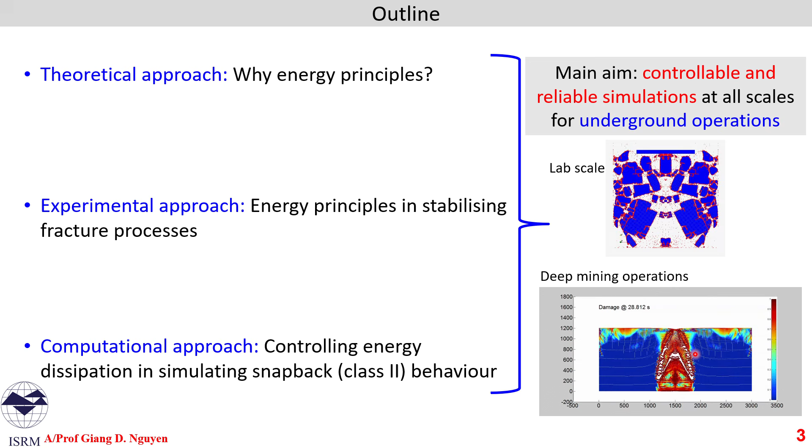So we start first with the theoretical approach, where I will explain the importance of energy principles and the use of energy principle to predict rock burst in mining operation.

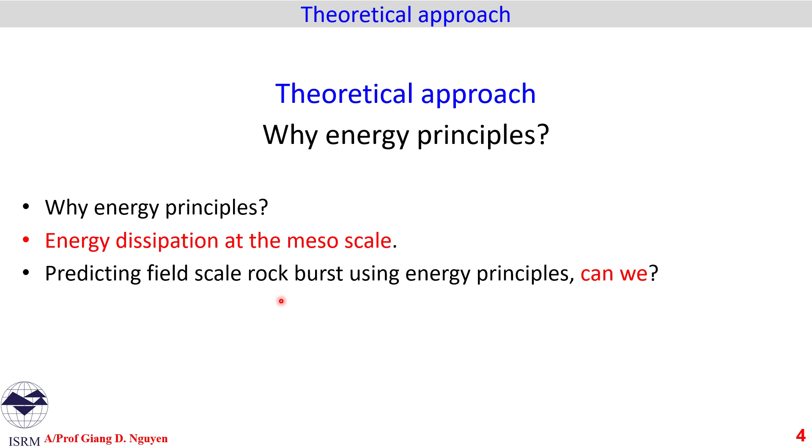So at first, this is the test to give us an idea about why we need such a thing, say energy principle, and how useful that is. This is the ISRM standard or recommended test using the chain extensometer on the uniaxial compression of a sandstone in this case. If we are able to successfully control the test, the result will be shown later.

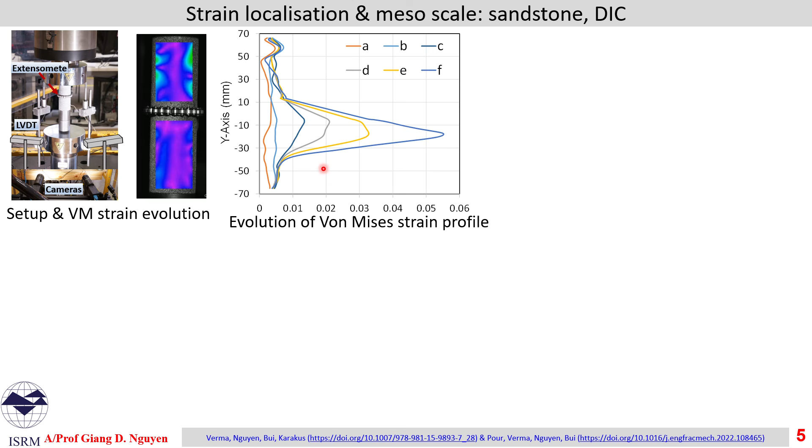We can see the strain evolution and in the end a shear band like this. If we plot the evolution of von Mises strain across the shear band at different stages, we can see such a kind of strong inhomogeneity well beyond the acceptable range for what is called homogeneous kind of material behavior. That happens mainly close to the peak, and beyond the peak, this strain localization intensifies, and in the end, clear shear bands occur, separating the specimen into two parts.

If we plot the evolution of strain, say axial stress and time, together with three different strains - the strain inside the shear band, the red zone here, the strain outside the shear band, and the macro average strain - we clearly see the bifurcation point, beyond which all these three strains follow different paths. Outside the shear band, unloading happens. As you can see, somehow the reduction of strain outside the shear band, while the von Mises strain inside the shear band keeps increasing. The macro one, the average one over the volume, is the volume average.

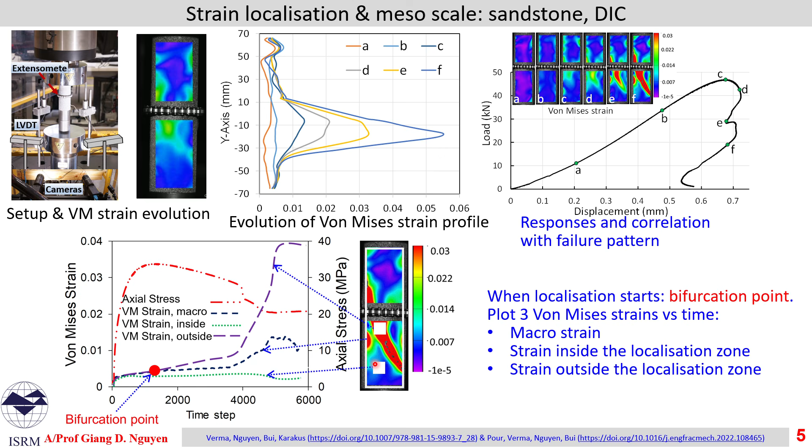And this is telling us something. This is bifurcation, beyond which we don't have a single stress-strain relationship anymore. Stress can be very similar, but strains, as you can see here, become very different. The macro strain, the volume average one, and the strains inside and outside the shear bands, they are very different.

Now, if we test three different aspect ratios, length by diameter of 1.5, 2.5, and 3.5, and plot the load displacement curve, we get three very distinct curves. The longer the specimen, the softer the behavior.

Softer means the initial elastic stiffness is lower, and the post peaks are also very different. But if we normalize everything to get stress-strain behavior, we see that the elastic stiffness is almost similar, with some small variation due to inhomogeneities of the material across the three specimens. The post peaks are very different, so stronger softening or snapback for the longer specimens, length to diameter of 2.5 and 3.5.

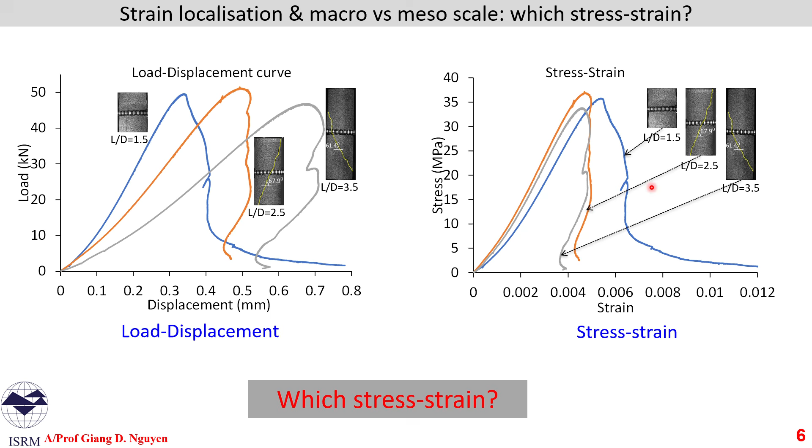So the question is: which stress-strain relationship will we use? We know the strain will be different, so we plot the average one here, and they will also be different across the three specimens.

If we use digital image correlation to work out the stress-strain relationship, stress is assumed roughly the same because they need to meet equilibrium condition across the shear band. Strain, as we know, is very different.

If we plot the macro stress against strain, inside the shear band in red, outside the shear band in blue, and the macro black one, we see three distinct behaviors: unloading outside the shear band, and strain intensifying inside the shear band.

The macro one is in fact the volume average one. In this case, we cannot use the macro, volume-averaged one to represent the behavior of the material.

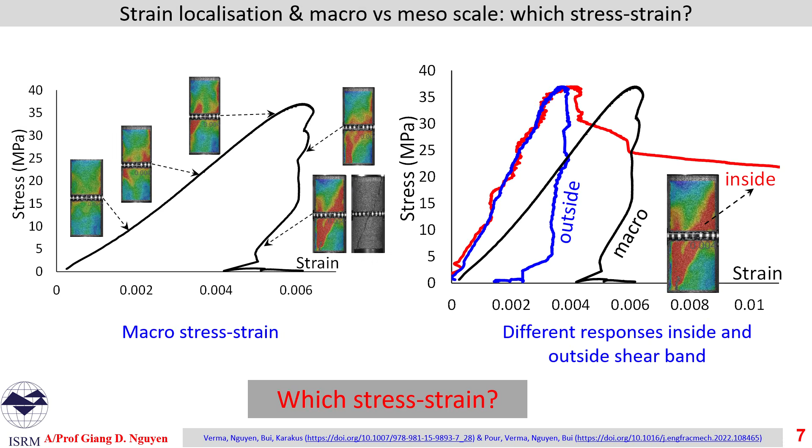We go one step further to look at energy dissipation. I represent here the load displacement curves of these three specimens. Under idealized conditions, the two specimens with length to diameter ratios of 2.5 and 3.5 roughly have almost the same shear band angle, and ideally under the same stress conditions and same material, this shear band angle should be the same, and it is the case when the length to diameter ratio is large enough.

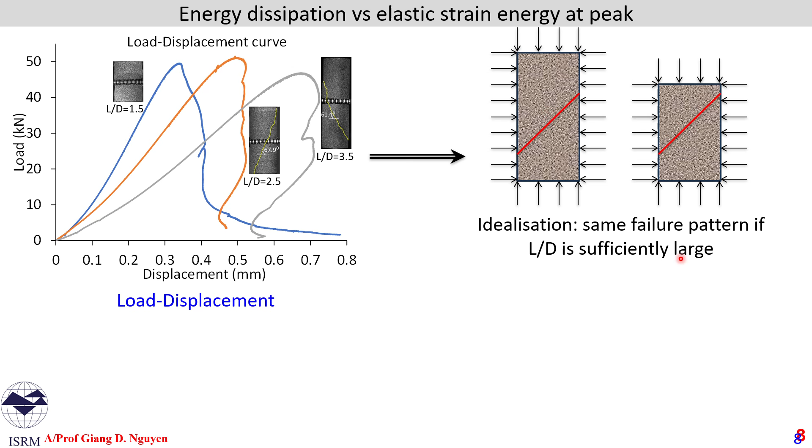So we consider these two cases as an example. The conclusion is that if they are under the same stress conditions, they should have the same shear band angle and the same dissipation, due to the creation and evolution of the shear band.

If the dissipation is due to fracture, it scales with the surface area due to the creation of new surface areas. But if we look at the whole specimen under the same stress condition, and look at the peak, they store different amounts of energy. The peak of all three specimens is roughly the same, and theoretically they should be, because they're the same material and failure happens at peak under the same stress threshold.

The area under this curve represents the energy stored in the specimen, and the stored energy scales with the volume. So the larger specimen has larger amounts of strain energy at peak stored in it.

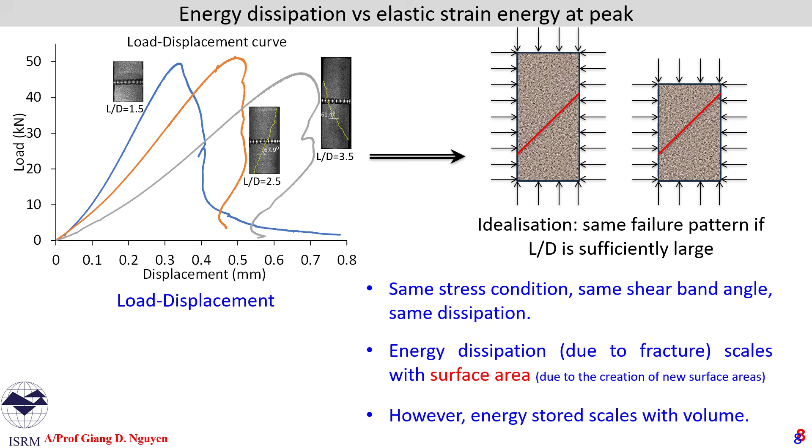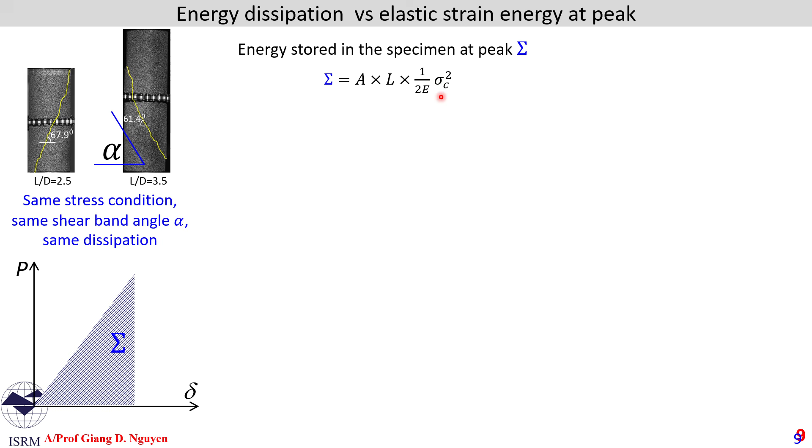If we look at these two cases and plot the load against displacement, we can see that at peak this specimen is storing some amount of energy, sigma, scaled with the volume of the element. A is the cross-section area times the length, and 1/2 sigma c squared over E, with sigma c being the compressive strength, is the strain energy per unit volume.

The dissipation in this case scales with the area. Given the shear band angle and the cross-section area, we can work out the area of the fracture or shear band. Assuming the dissipation per unit area is GF, we have the dissipation of the specimen at the end of the failure process.

Snapback, or class 2 behavior, happens if the storage is larger than the capacity of the specimen to consume energy. As you can see here, the red area, snapback happens if the red area is smaller than the hatched blue area.

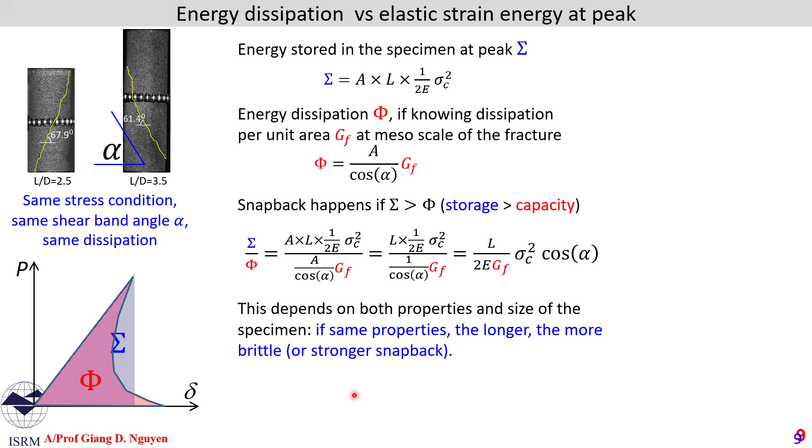That means for the same materials and properties, the longer the specimen, assuming the same cross-section area, the more brittle the load-displacement behavior is, and hence the stronger snapback observed. This is what we saw earlier in the previous slides.

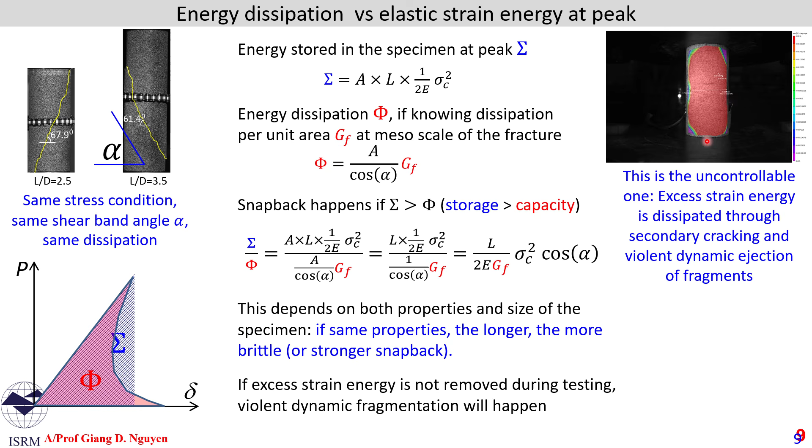To control it, we need to remove the excess strain energy in the specimen so the test machine can successfully capture this kind of snapback. If not, very brittle or violent dynamic behavior will happen, as seen here from our test under direct, vertical displacement control.

So what can we do here? If we know this energy principle, we can proceed further in using it to predict rock bursts. As you can see here, a video of rock bursts in underground operation, we consider the stress condition and a certain type of specimen with this prismatic shape.

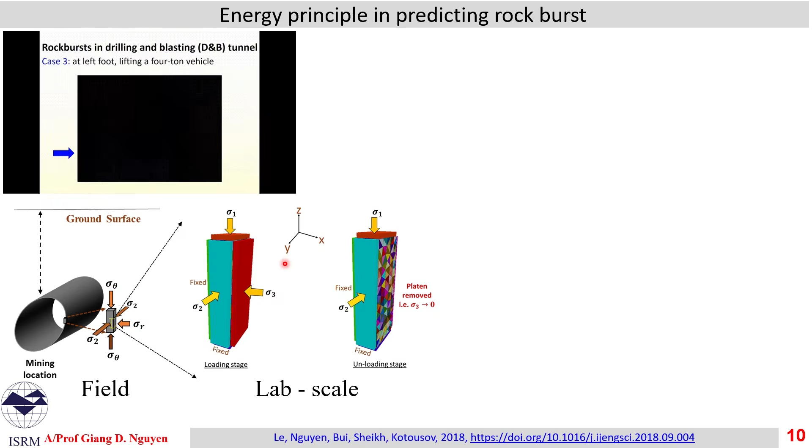We know from our theoretical work that failure happens depending on the stress state, and the shear band or localization orientation depends on the stress states, as you can see here. This is the illustrative result from our papers, validated with experimental data.

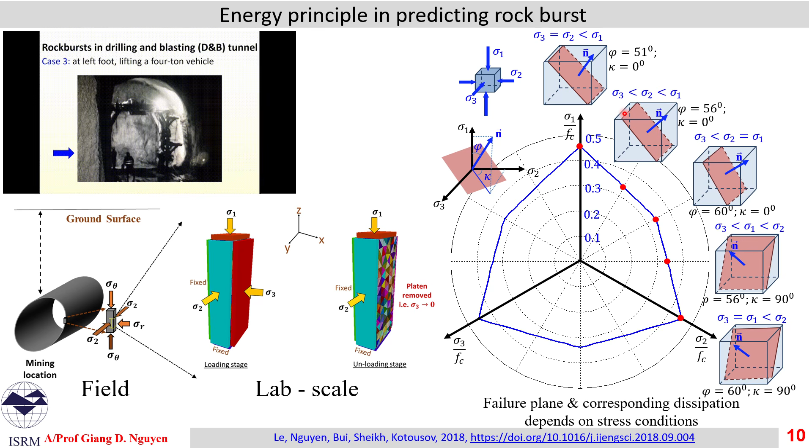We use this kind of failure pattern and corresponding dissipation, because dissipation mainly happens on the shear band or on the fracture surface. So we use that to bring it to mining operation to predict rock burst.

So if we consider this kind of prismatic volume element with width W and depth B, length L, H given under three principal stresses sigma 1, sigma 2, sigma 3, we can work out the elastic strain energy stored in this volume element before the release of stress in one direction. As you can see, it scales with the volume of the element, and is given by one half C ij KL, sigma ij, sigma KL.

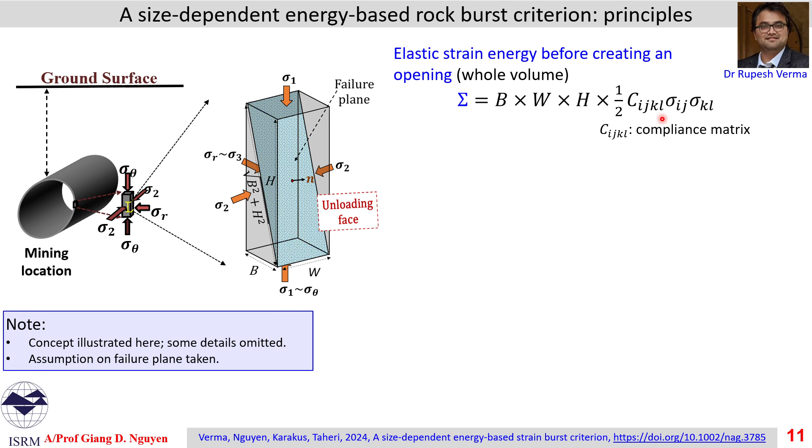It is the elastic strain energy stored in the volume, per unit element, per unit volume, before the failure.

So if one principal stress is released, failure is assumed to happen on that plane, and the dissipation capacity of the specimen scales with the surface area of that plane, and we can work out the dissipation capacity in this form.

Rock burst in this case happens if the specimen stores energy more than the capacity to consume it. That's the ratio, and that allows us to give an indication, or even magnitudes, of rock burst. So if storage is greater than capacity, rock burst can happen, but this is not always the case, because it still depends on another sufficient condition, which is the failure criteria.

This is a simplified presentation of a more technically complex one. Some details are neglected here just to make the presentation easier to follow. You can have a look at our paper, published a few years back.

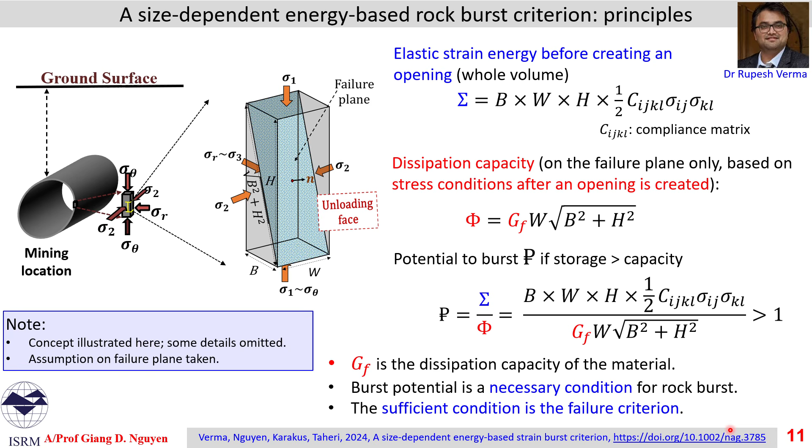So now this is the illustration of how things work, how we use the concept of burst envelope here to help predict rock burst.

We have the first stress path, the stress path going out of the burst envelope. That means the energy stored in the specimen under this stress condition is potentially leading to bursting, because the storage capacity is greater than the dissipation capacity of a single shear band in this case.

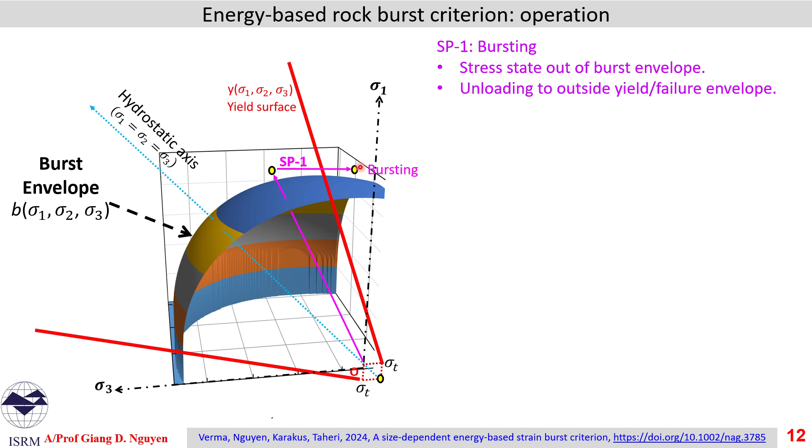And if we unload it, meaning we release one principal stress, it is shooting outside the yield surface or failure surface, the red curve here. Then it will indicate bursting, because in this case two conditions are met: the initial stress point is outside the burst surface, and the one after stress release is also outside the failure surface, so bursting will happen in this case.

But the second stress path gives us an indication of burst potential, but when one principal stress is released, the stress path is pointing back to inside the yield surface or failure surface. So in this case these two conditions are not met, so no failure or bursting.

The third case: both points, beginning and after the release of stress, are inside both the burst envelope and the failure envelope, so no failure happens.

The other scenario is the case of the stress point at the beginning, with the three principal stresses inside the burst envelope, but when one principal stress is released, it moves outside the failure surface. In this case, no bursting happens.

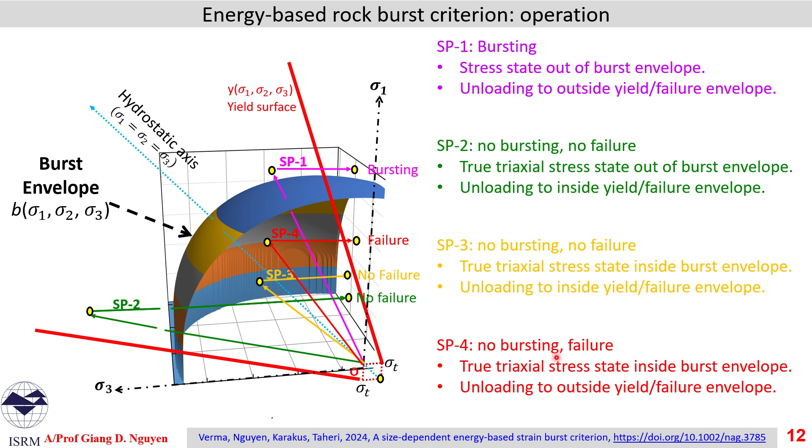So we have this theoretical illustration and also the validation here. Only one case, with this stress path 1 which leads to bursting, is used here.

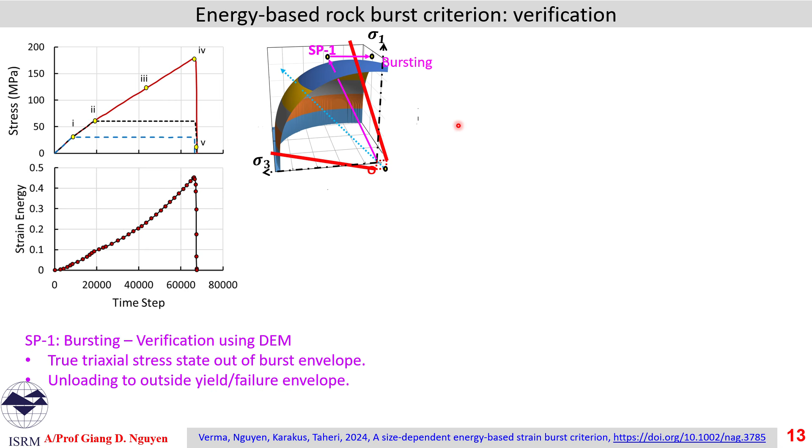So if we load the prismatic volume element to a certain stress level, sigma 1, 2, 3, following this kind of stress path, and release one principal stress, in this case the final stress point is outside the failure envelope, and bursting theoretically can happen. Our discrete element simulation, following the same kind of stress condition, and the release of one principal stress in this case leads to violent dynamic behavior.

Which is an indication of bursting. So this is the case of bursting, theoretically predicted and verified using numerical simulation.

Of course this is a simple enough illustration of the concept followed by verification. It will take a lot of work and time to bring this to practice, how to apply this in deep mining situations. So we are still working on that.

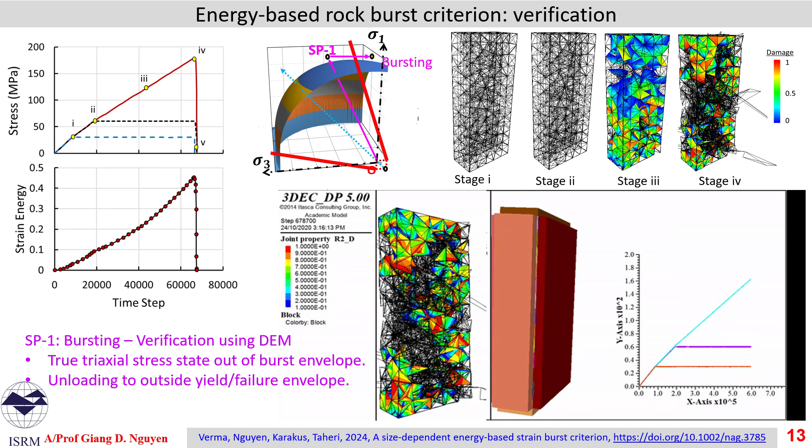So I have shown the theoretical approach on why energy principle. We will apply some of the things presented in the previous part on stabilizing fracture processes in rock testing. The main aim is to get more intrinsic properties.

An example here is the fracture energy in a loose sense at the mesoscale of the fracture. Mesoscale here refers to the scale of the shear band or fracture surface. We'll show some test results and implications as well.

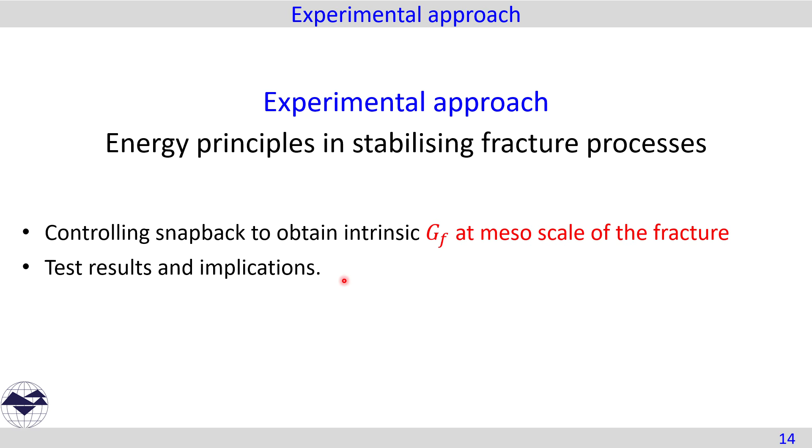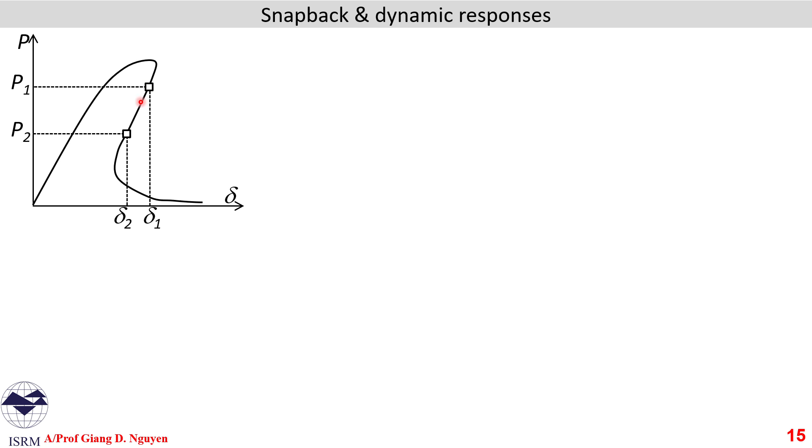So at first, it's about snapback or class 2 behavior. We use a 1D example here because it's always easier and more straightforward. We indicate 2 points, P1 and P2, along this stress path, and correspondingly we have 2 displacements, delta 1 and delta 2, on the snapback curve.

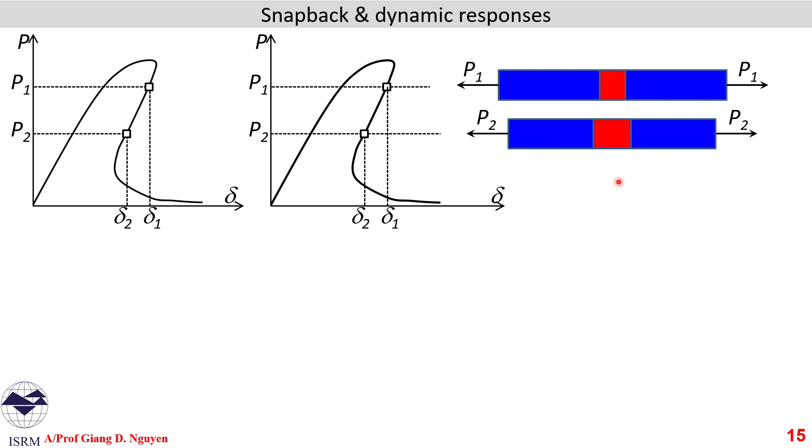So if this is the macro load displacement behavior, it's a combination of two behaviors inside and outside the fracture process zone. The red zone here is expanding while the blue zone is shrinking, indicated by the two different parts. They are under the same stress condition or load, if the cross-section area in the red and blue zones are the same, which is the case assumed here.

So the macro curve is the volume average of the red and blue ones. Snapback happens when the blue one is shrinking more than the expansion of the red one.

And this is what we may have in experiments. Say if we have a longer specimen, the blue zone gets bigger while the red zone stays almost the same, because if they're the same material under the same stress condition, the fracture process zone is the same in both the longer and shorter specimens.

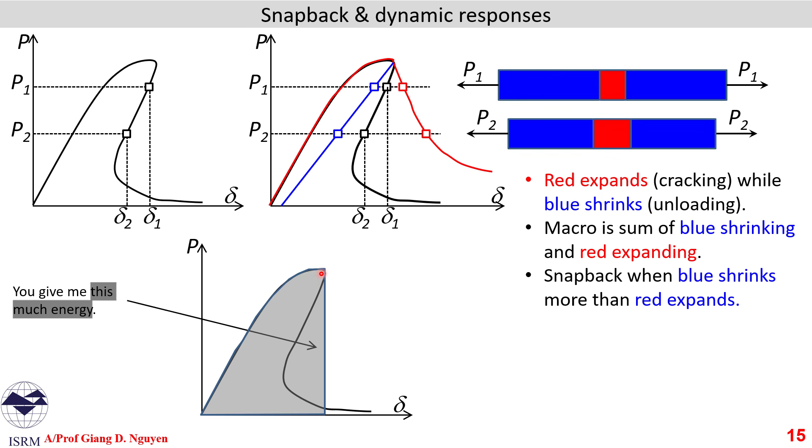So in terms of energy, this is the case: the gray area here is the energy stored in the specimen at peak, but the snapback here, the red area, is the energy the specimen can consume. If we give the specimen more energy than its capacity to consume...

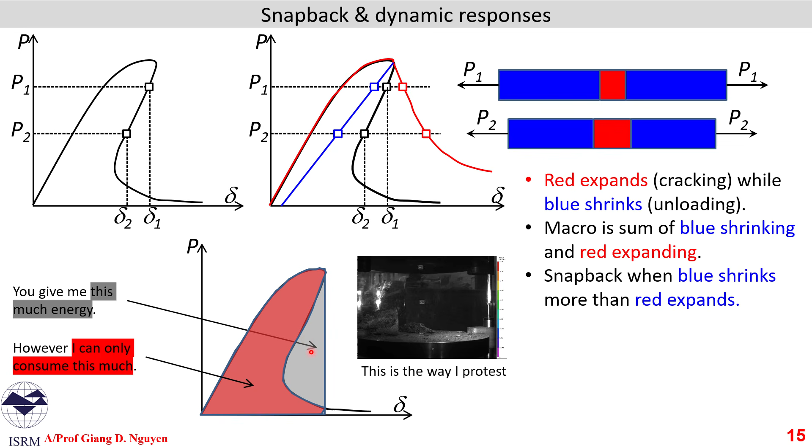...through a single fracture process zone or shear band, then more shear bands or even very violent behavior must happen to consume the excess strain energy, the difference between the red and gray areas. So we use this principle in testing to control the fracture process, based on PID, which stands for proportional, integral, and derivative.

So say if we have these two things and we are using the expansion of the red zone to control the process, it means the crack opening, or the rate of crack opening, should follow the specified value that is used to control the fracture process.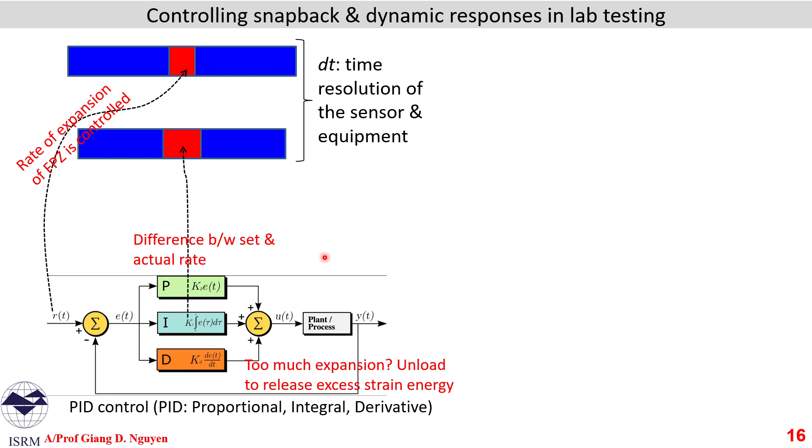And if this is expanding more than the specified value, slight unloading will happen. So this loading-unloading process using PID control will gradually remove the excess strain energy and allow us to capture the whole fracture process in a very stable way.

We use this in a few different kinds of tests, and one of the more challenging ones is the Brazilian disc. In this case we use lateral expansion from an LVDT as feedback to the control, so that the loading process, the vertical velocity, can be adjusted gradually to remove the excess strain energy.

Of course, this is just one example. Another example includes the use of acoustic energy release or dissipation, if we have a way to measure it, as the control.

The dissipation or energy release happens mainly inside the fracture process zone at the mesoscale. The quantity related to the mesoscale can be a good one for control. It could be acoustic energy release, dissipation, or expansion of the fracture process zone.

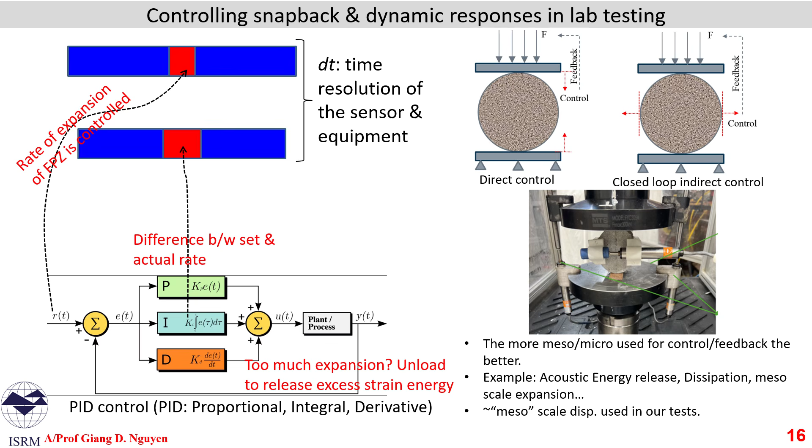The same principle applies to triaxial tests. In this case, we use lateral strain attached to membranes for testing hard rock, and we can manage to capture snapback even under sufficiently high confining pressure, say 60 MPa, for a hard rock.

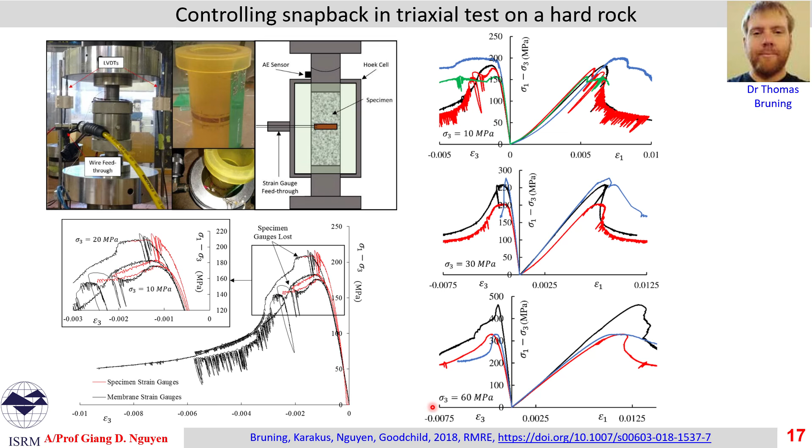This kind of control we call AUSBIT, Adelaide University Snapback Indirect Tensile Test, has been applied to a range of materials from soft rock like sandstone, to hard rock like granite, bluestone, and even concrete. Concrete in this case exhibits class 1, or normal softening behavior. The technique was able to capture both class 1 and class 2 behavior for a range of materials, as you can see.

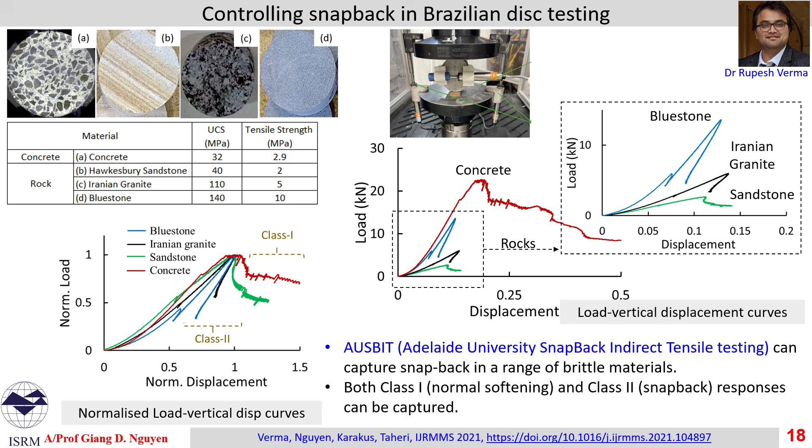So what happens here at small time scale? We already mentioned the release of strain energy to stabilize the fracture process. We use this example of a successful Brazilian test using AUSBIT, our control method, to show the principle and how it works.

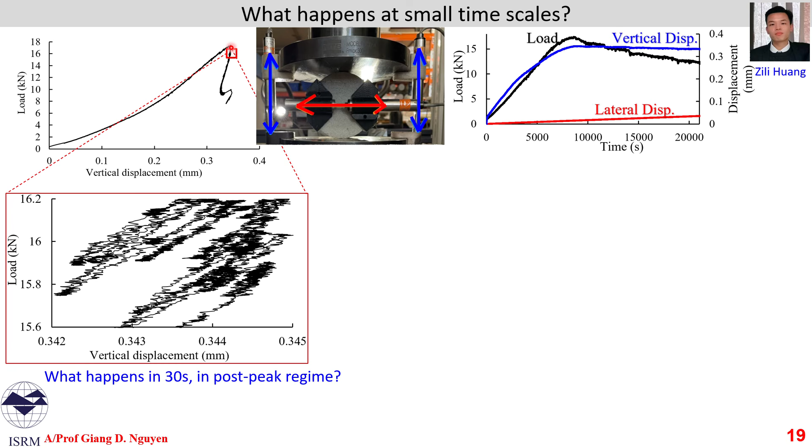If we look at a short time window, 30 seconds in the post-peak regime, we can see the effects of loading and unloading when we plot the load and vertical displacement together. The curve that looks smooth at a glance, when we zoom in, has this kind of behavior. And this is the consequence.

If we plot the load, vertical displacement (blue one), and lateral displacement against time, with a 30 second time window here, you can see the vertical displacement follows a downward trend, reducing, indicating snapback behavior or class 2 behavior. The lateral displacement, which is used to control the whole failure process, goes up and down, but the overall trend is always increasing, meaning fracture is gradually happening.

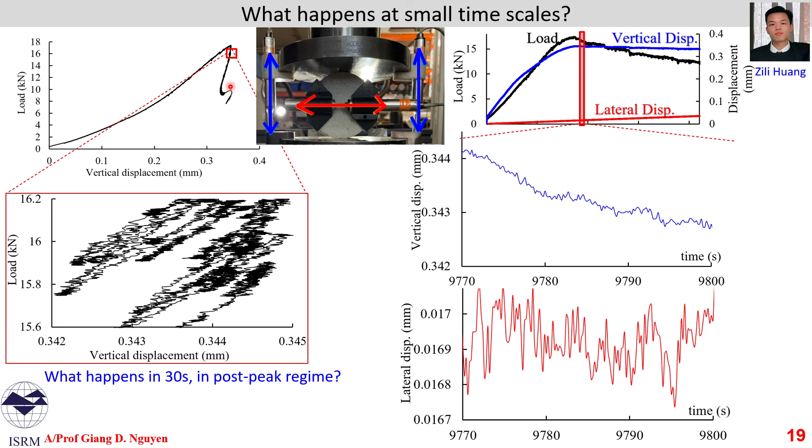The unloading and reloading process in a very small time scale, as you can see here, allows gradual release of excess strain energy, so that this kind of snapback can be successfully captured.

So we use this kind of test to work out two things reliably: the tensile strength. We know that Brazilian disc testing will give us indirect tensile strength close enough to the direct one, and we go a step further, inducing this successful snapback test using AUSBIT to obtain mode 1 fracture energy as well. So if this is successful from a single test, we can get two important properties: tensile strength and mode 1 fracture energy.

This is different from the standard test using 3-point bending configuration. The load in 3-point bending test drops to 0 at the end of the fracture process. For Brazilian disc test, if the specimen is fully split, the two halves can still hold a significant amount of load.

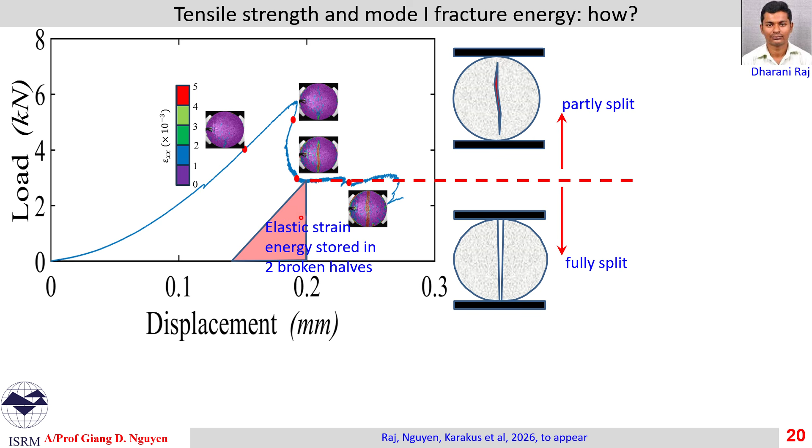The point here is to identify the moment of full fracture, when the specimen is fully fractured. Once we've identified that, assuming this is the moment at which the specimen splits into two halves, the two halves can still store a significant amount of strain energy, assuming this is the unloading slope at this moment. The energy dissipated due to fracture is the blue area here, limited by this kind of curve.

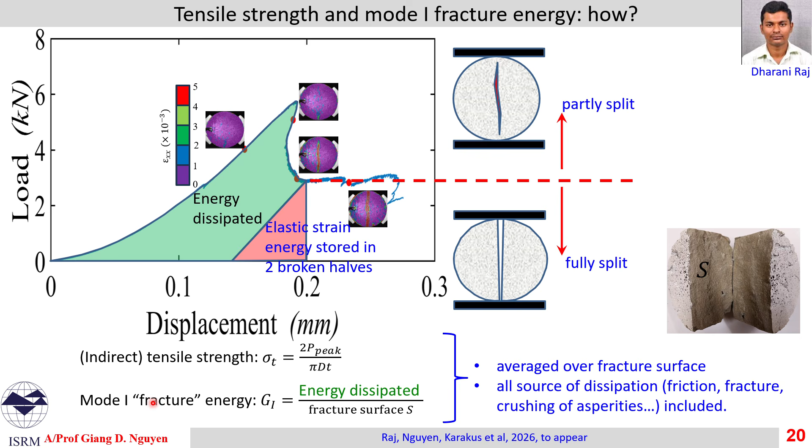The fracture surface, in this case, is something in the middle of the specimen that can be worked out. We can work out the mode 1 fracture energy as energy dissipated divided by the fracture surface S, calculated or worked out from the broken specimen diameter and thickness of the specimen. So if that is successful, we can work out two important properties: indirect tensile strength and mode 1 fracture energy.

So the remaining point is how to determine the moment of complete splitting. We use a few things here to identify or pinpoint when it is fully fractured. First, at the moment of full fracture, we observe in all tests so far a jump in both vertical and lateral displacement. If we plot them together at the moment of complete fracture, the lateral one exhibits this kind of jump, the orange one.

The vertical displacement also exhibits something very similar. This kind of behavior is also confirmed using acoustic emission. At this same moment, or at least roughly the same, they all exhibit a surge or jump in behavior if we plot the AE energy in this case.

So once we have identified this, we can work out and identify the moment of complete splitting. We can work out this given point B on the post-peak curve. From this configuration, as presented earlier, we can work out the fracture energy of the material.

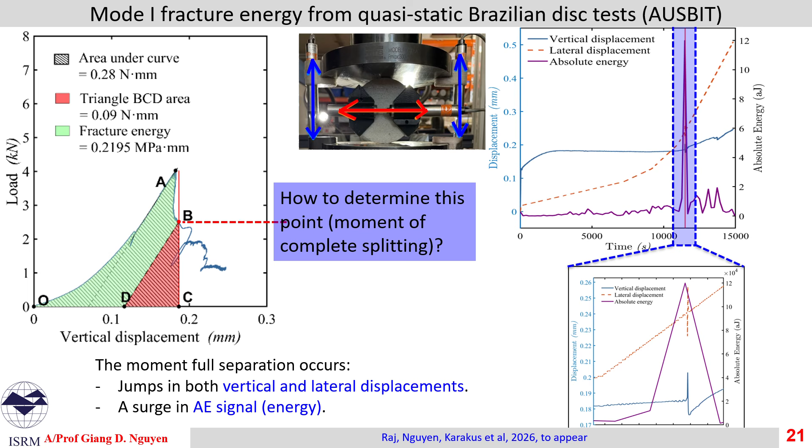So this works, and if we make a comparison, say if we use an uncontrollable one, like the standard Brazilian test, we usually get this kind of energy dissipation, because at the peak, the specimen suddenly splits into two halves in a very abrupt way, and the energy released in this case includes kinetic energy, which we want to remove.

So if we do the well-controlled test using AUSBIT, we end up close to quasi-static conditions, and we can pinpoint the moment of complete fracture and work out the dissipated energy and the fracture energy of the material. As you can see here, if kinetic energy or dynamic effects are removed, we can work out the red area here. This is only roughly 60% of the hashed area, which is the area we got under uncontrollable configuration.

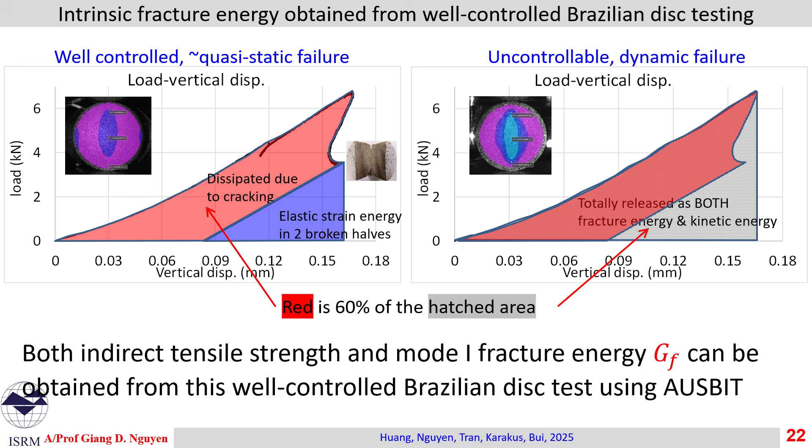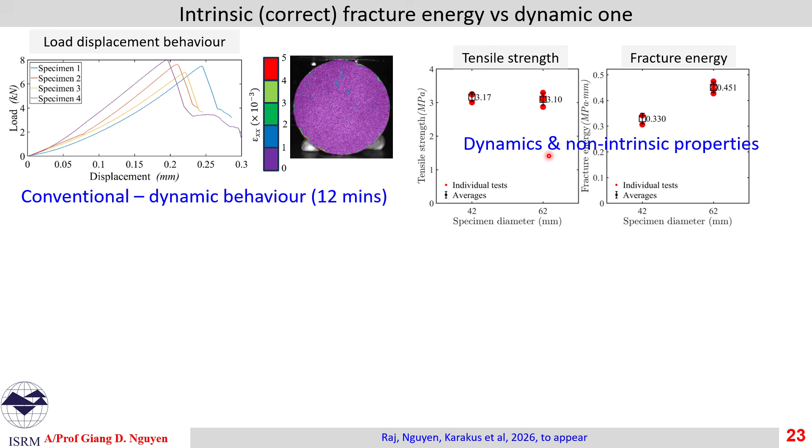So we perform a few things here to validate our work, validating the determination of both indirect tensile strength and fracture energy. The results presented here are from conventional Brazilian test. It is very fast, 12 minutes, and we got indirect tensile strength and fracture energy in this case. Because of the sudden fracture and violent dynamic behavior, the obtained fracture energy in this case is not intrinsic; it includes dynamic effects.

So if we use our well-controlled test, the fracture process is very long and gradual, and we can capture the full snapback curve from which we can reliably obtain the tensile strength, in this case slightly below the indirect tensile strength obtained from the standard Brazilian disk. The fracture energy in this case is much lower than the case in which dynamic effects are not removed, which is the case of standard Brazilian disk testing.

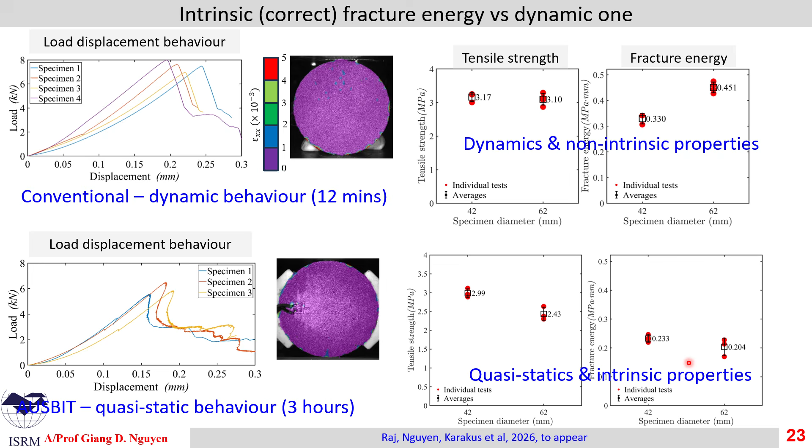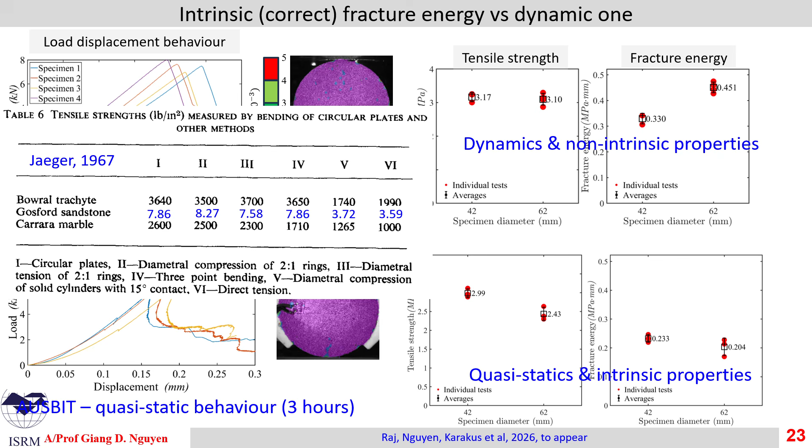We can have a brief idea of the tensile strength here on Gosford sandstone, the sandstone used in this test. A long time ago we got a paper, and the direct tensile strength in that case is 3.59, which is close enough to what we got here. The difference could be the inhomogeneity of the material, and this still needs a bit more investigation.

Coming back to what we want: tensile strength and fracture energy. Tensile strength looks alright. Fracture energy we need to validate with other more acceptable methods.

In this case, a 3-point bending test is used on two different types of specimen of different diameters, 84 and 106 millimeter. This is a stable fracture process, and in the end the load drops to almost zero. The area under the curves in the two cases is used to work out the fracture energy, and we get a very close result. The 3-point bending test gives us that much fracture energy, and our technique gives us that much, and they are very close to each other, which indicates the reliability of the proposed test using lateral displacement control on the Brazilian disk.

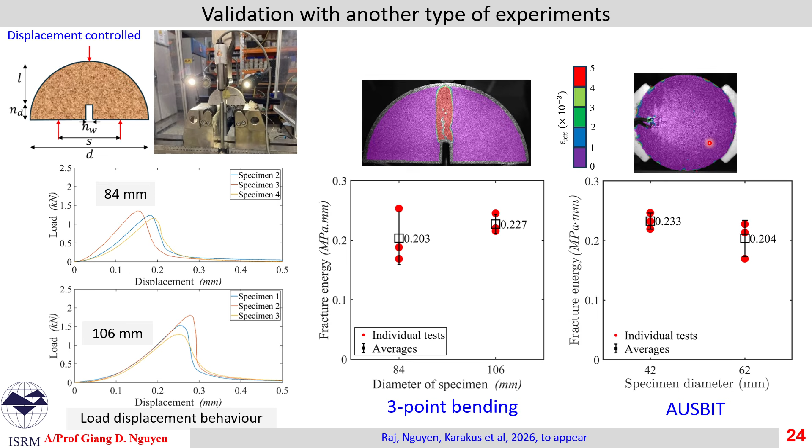The last part is, what do we do? We might have good enough or reliable intrinsic material behaviors, say tensile strength and fracture energy, mode 1. We can use this for our simulation, and the focus here is the snapback, to capture the things we observe in experiment.

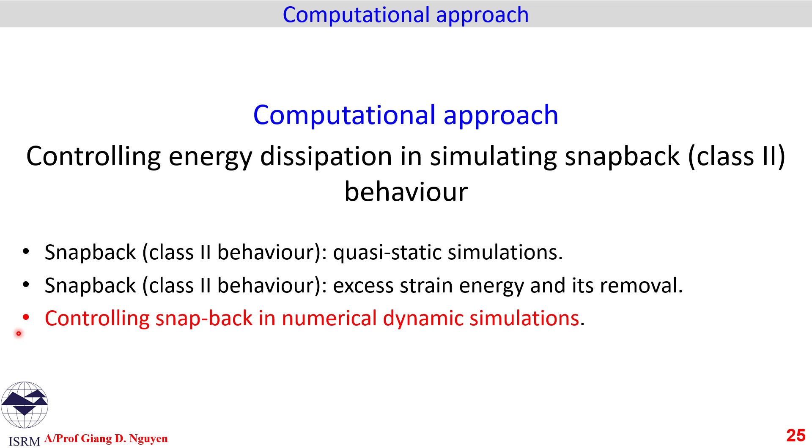Snapback can be captured under quasi-static simulation, which we'll talk about soon. The one we are dealing with here is the dynamic simulation. For dynamic simulation, we need to remove the excess strain energy in a good way so that the simulation will be stable. This is the key focus of this part.

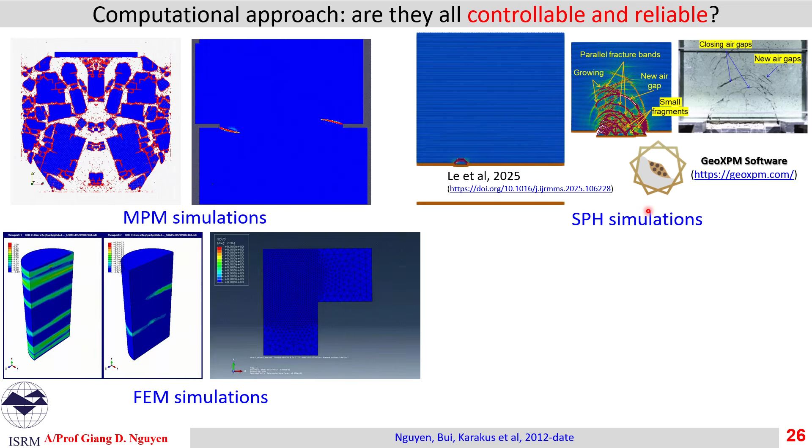So in the end, the ultimate goal is to have something reliable and controllable, because we don't want to stop at just simulations using different methods, say material point methods, finite elements, and particle hydrodynamics. The main aim is to go to underground operations and perform or predict something, and our prediction must be reliable. That's the main aim, though of course this is a long way towards such a reliable and controllable simulation in underground operation.

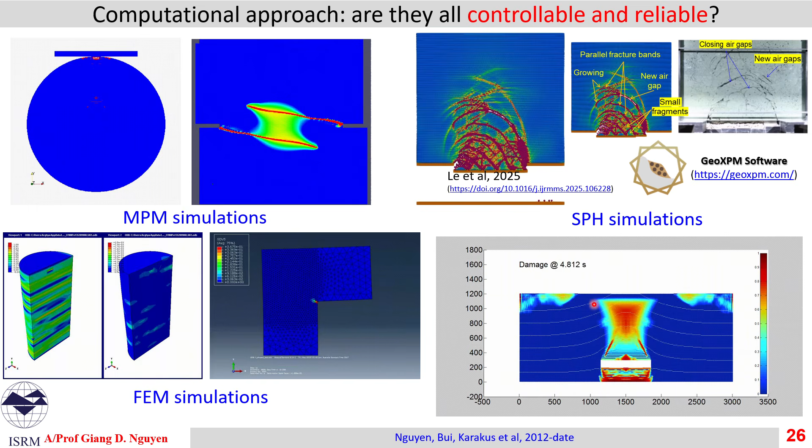The main focus of this work is mainly on a few things that help us achieve this ultimate goal in the end. The first thing is this snapback. This is something well known in the community of concrete fracture, so I'll use an example that we did a long time back.

Snapback in this case can be captured quite straightforwardly under quasi-static condition, meaning our governing equation doesn't include the dynamic effect. It doesn't have acceleration; we remove the acceleration totally from the governing equation and solve the quasi-static equation, and that will require arc-length control to capture snapback.

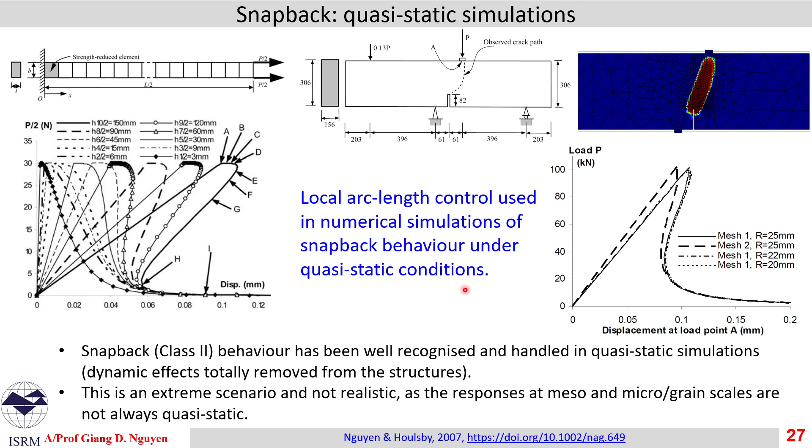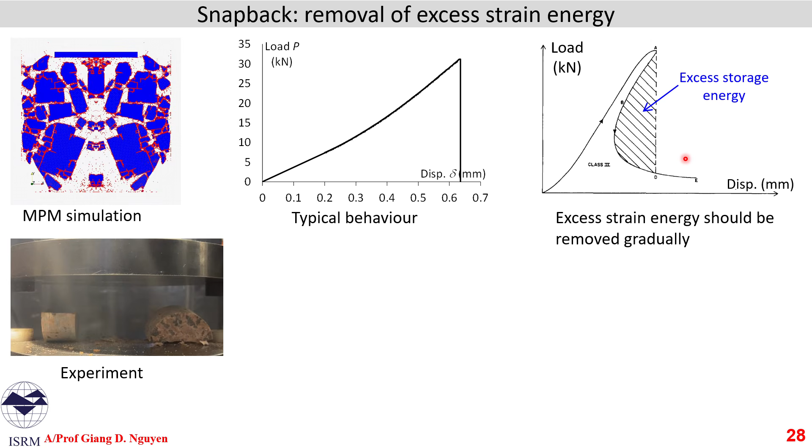So the challenge is to capture or control this kind of violent fracture process in experiments, and how we mimic that in simulation. If not, it will happen like this: very dynamic, very violent behavior. Typical behavior without control is the vertical drop of load when it reaches the peak. This is because, as explained earlier, the excess stored energy leads to secondary cracking and dynamic behavior, ejection of fragments to consume the excess strain energy stored in the specimen.

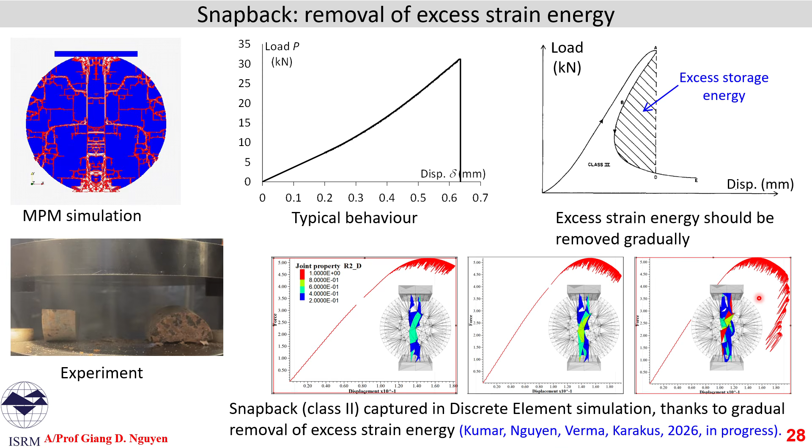We had some successful simulations here using the discrete element method, 3D in this case, but this is still a work in progress. We apply the same principle, the gradual removal of strain energy, to capture the snapback process and stabilize the fracture process, in this case for the Brazilian disc.

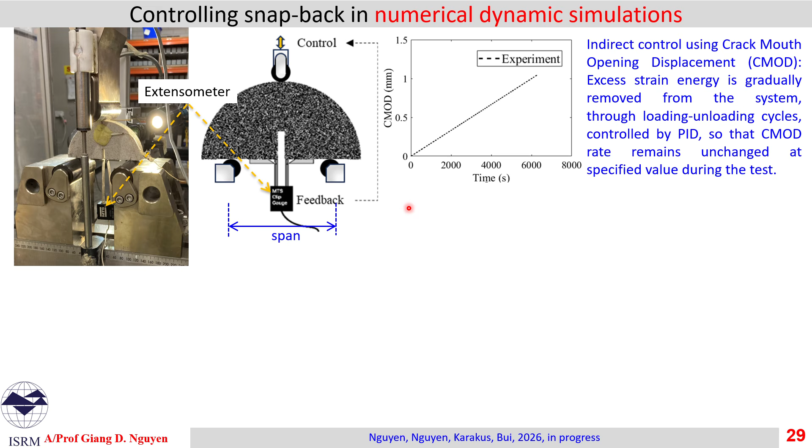So in order to do that, we have feedback from the clip gauge, giving us the crack opening that is fed back to the controller, so that loading and unloading processes can gradually take place, and that kind of loading-unloading cycle will remove the excess strain energy from the system.

As a result, if we change the span from smaller to larger, we capture a range of behavior, from very strong snapback to milder and very little snapback when the span is large enough.

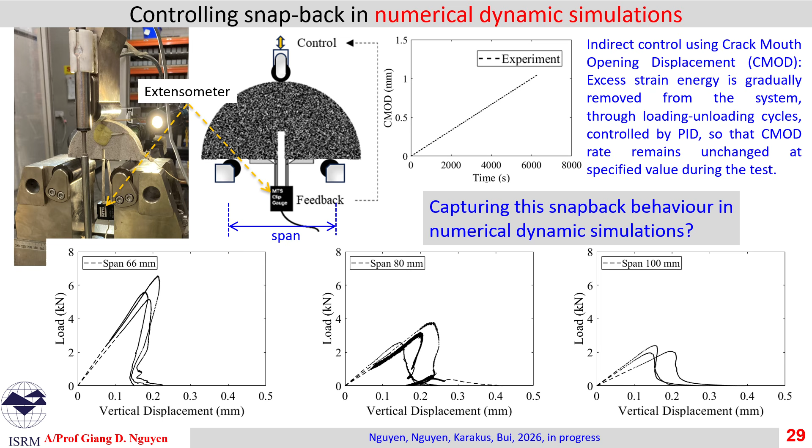The question here is whether this kind of snapback can be captured using our numerical dynamic simulation. Dynamic here means we don't remove the acceleration term in the governing equation, and this is even more challenging than capturing this under quasi-static conditions.

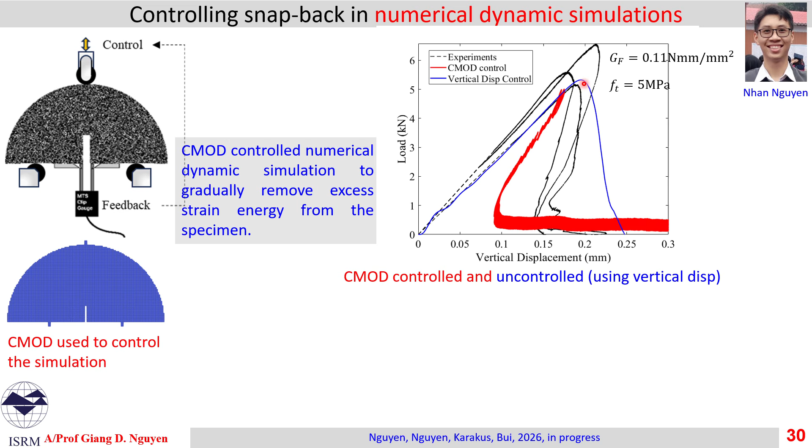When we compare it with the normal way of control, using vertical displacement, we can see a clear difference. The blue curve here doesn't show any snapback. Of course it cannot, because the vertical displacement is not reversing beyond the peak.

And the failure patterns look very different. There's a very clean crack in the well-controlled one, while in the uncontrolled one fracture happens very fast. The difference between the two simulations is this area, which represents the energy used to create more secondary cracking in the uncontrolled one.

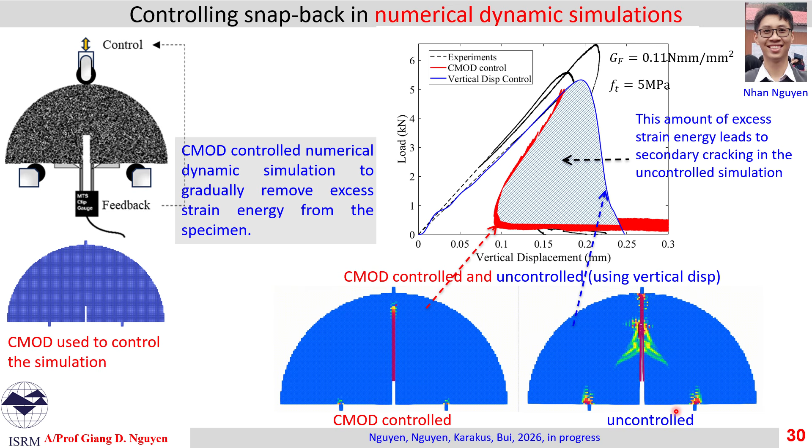We also observe a difference in the peak load. The same parameters are used, but different types of control lead to different peak loads, and the explanation here is the rate inside the fracture process.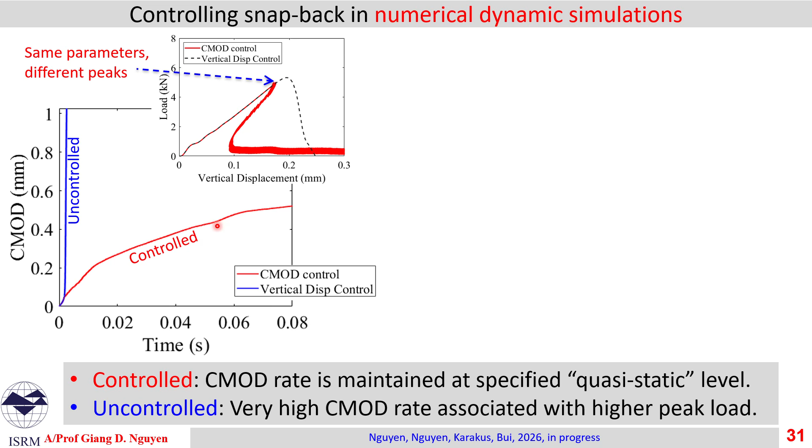For the uncontrolled one, beyond a certain moment, the crack mouth opening displacement jumps very sharply, indicating a very high dynamic effect due to fracture and release of energy. The controlled one is very mild, as you can see, the crack opening displacement follows what we expect.

When we compare with the test data, of course we are not yet able to match it in terms of rate, because the rate used in the experiments is very low, about 10 to the power minus 5 meters per second. In the simulation, the red well-controlled curve is now about 10 to the power minus 2 meters per second.

At the moment of crack initiation, you can see the jump in load for the uncontrolled test is associated with a jump in the opening. While in the more controllable one, using crack mouth opening displacement control, the very stable opening rate leads to a lower peak load.

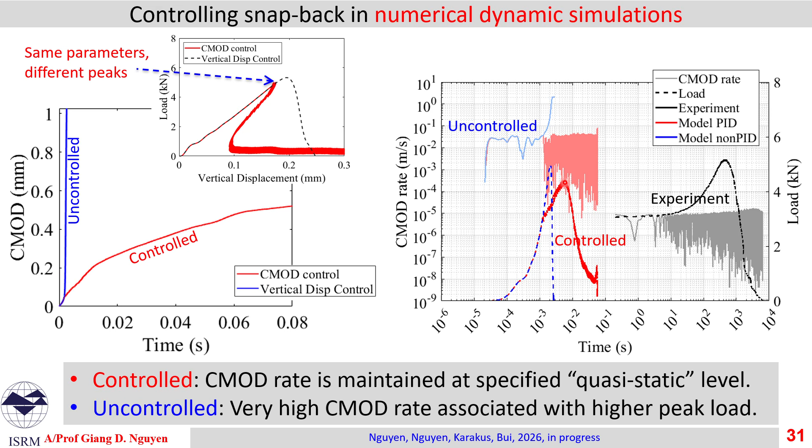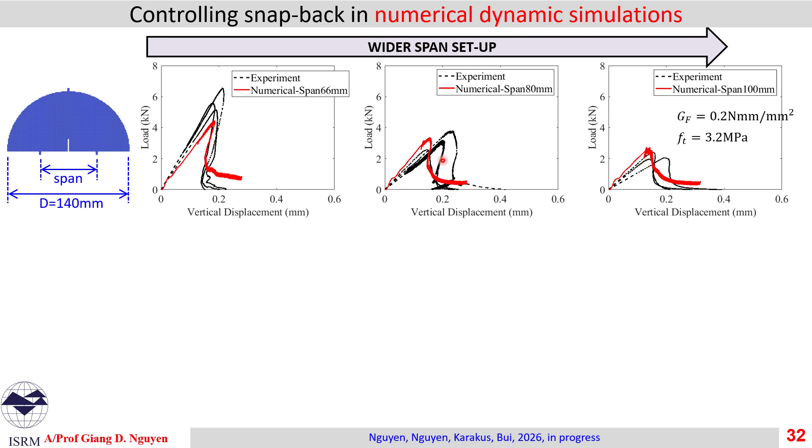This kind of control is used in our simulation across three different spans, as you can see here, 66 to 100, and we can capture quite well the snapback, or class 2 behavior.

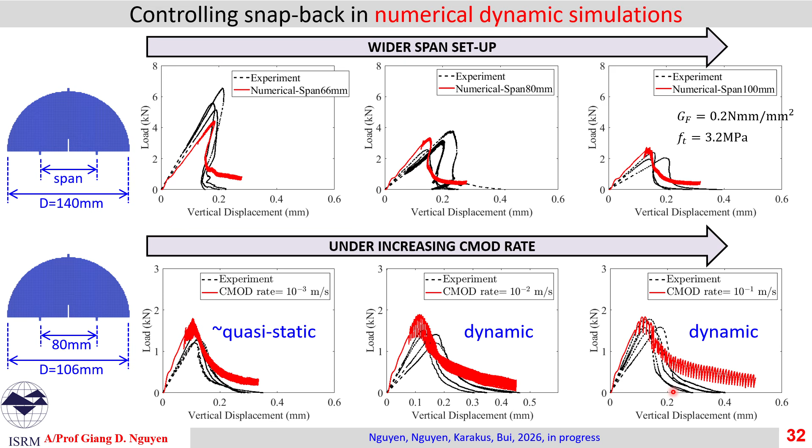We can use a different type of specimen to explore the effects of dynamics on the behavior. Under this fixed configuration, we change the crack mouth opening displacement rate used to control the test, and we can still capture, at least to some extent, the behavior under different CMOD rates.

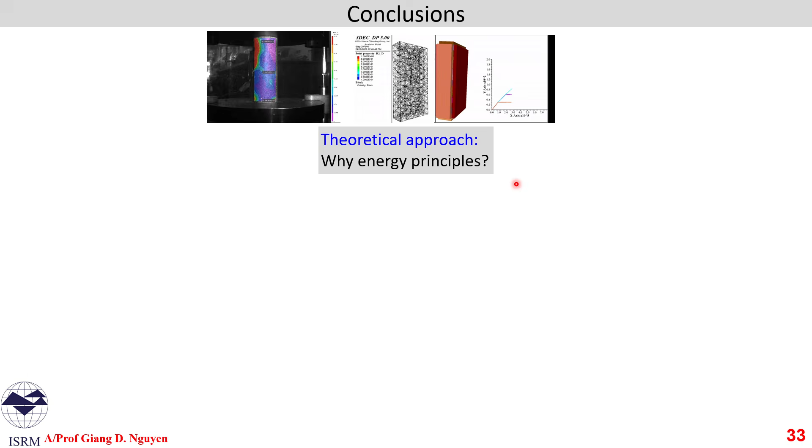So to sum up, this is our conclusion. We have presented three different parts: the theoretical part, stressing the importance of the energy principle; the experimental part, on the application of this principle in stabilizing the fracture process for Brazilian disc testing to obtain reliable and intrinsic properties, tensile strength and fracture energy.

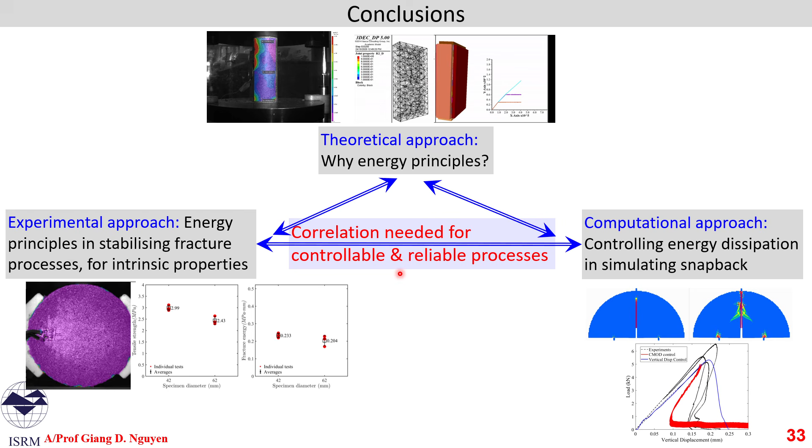We use these properties and the same energy principle in testing, and in simulating rock fracture to capture snapback. Our main message here is the correlation between these three parts, to get more controllable results and to control all these fracture processes.

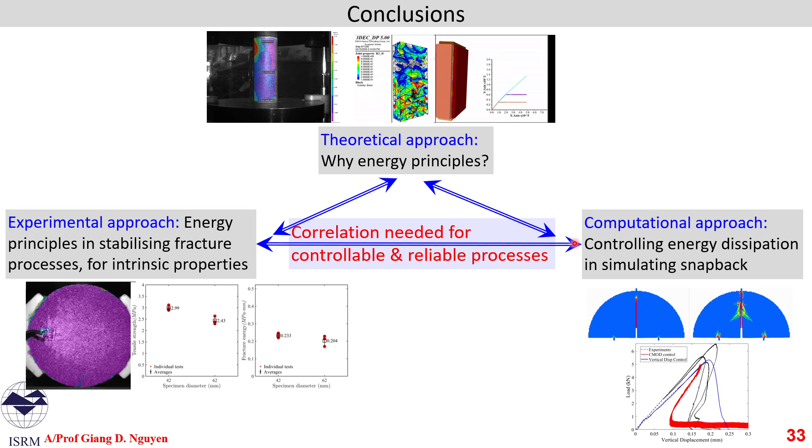In this case, all the examples are at lab scale, but as I said earlier, the main aim is to go to the larger scale of deep mining operations, to have more controllable and reliable simulation. So the correlation between these three parts hopefully will help us achieve the final goal, but of course this is a long way.